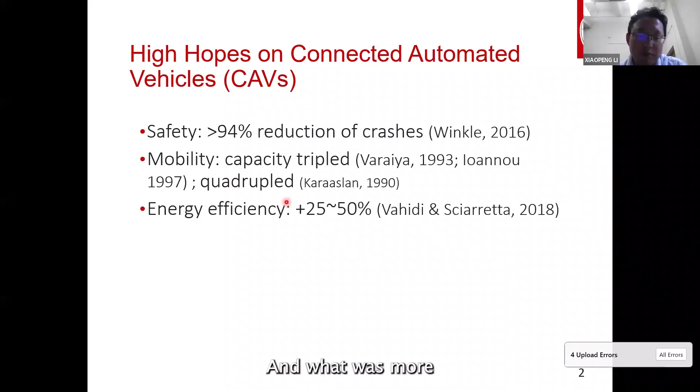There were lots of studies in the past with very optimistic predictions about autonomous vehicles, or broadly speaking, connected and automated vehicles - CAV technologies. What was more exciting was that this kind of technology was piloted in 1997, where every vehicle followed each other with very short headway at a speed of 60 miles per hour.

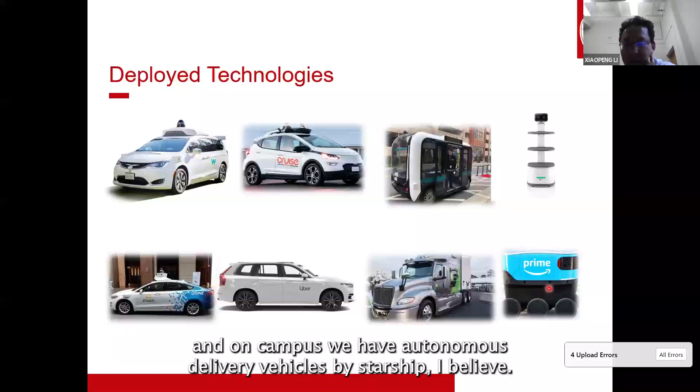So there are already lots of deployed technologies like Waymo, Cruise, and some other companies like Ford and Uber have already tried out autonomous vehicles. You also see other modes of autonomous transportation, like shuttles, that have been demonstrated. Autonomous trucks are there, and on campus we have autonomous delivery vehicles by Starship, I believe, and also in some restaurants you see this kind of delivery robots, in closed environments, in hotels or restaurants.

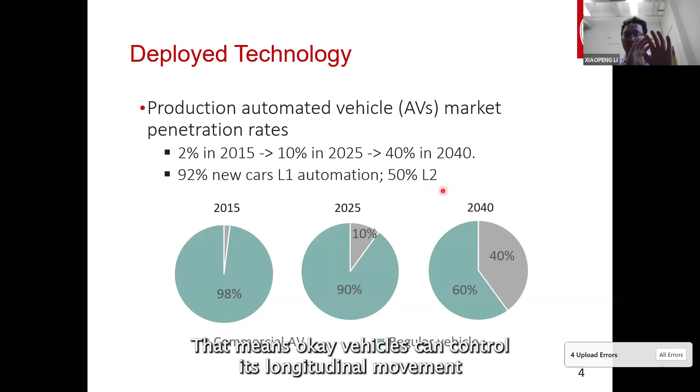So production automated vehicles have already penetrated a lot in the market. I'm talking about vehicles with automated features that you can buy from dealers. There have already been quite a lot of new cars installed with L1 automation - that basically means adaptive cruise control that can control a vehicle's longitudinal movement automatically - or with L2 level 2 automation, which means vehicles can control longitudinal movement and also do lane keeping, to make curves and turn along the road geometry.

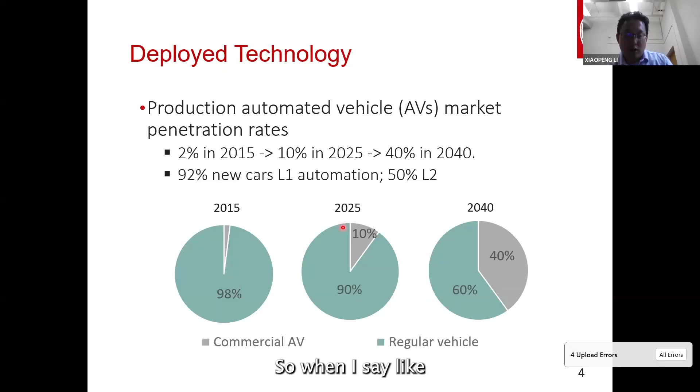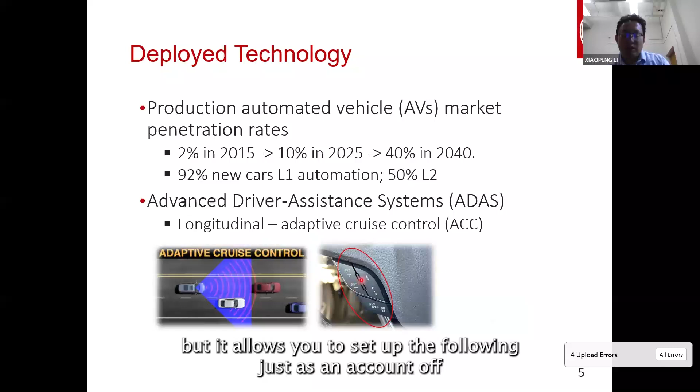So when I say L1 automation, the key technology is called adaptive cruise control, which is a significant part of advanced driver-assistance systems, ADAS. It's just going to follow the preceding vehicle automatically. If you have a car like that, it's just like cruise control, but it allows you to set up the following distance, and it can automatically react to the preceding vehicle to adjust its following spacing. You're going to see on your dashboard the following spacing, and some newer versions will show you the detected vehicles.

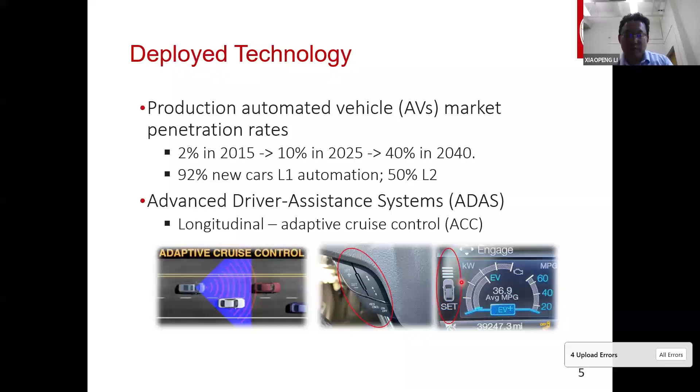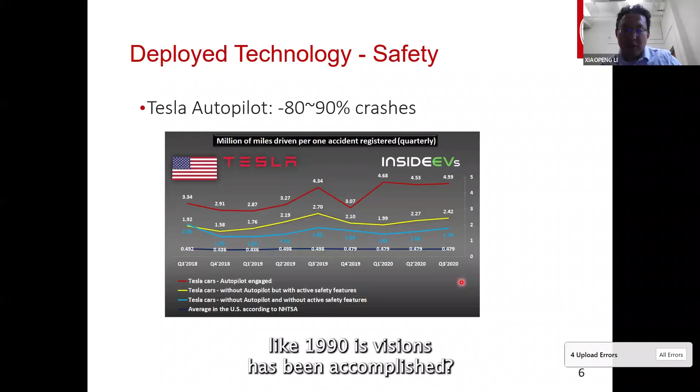So let's say, with this kind of deployment, how much of the earlier 1990s vision has been accomplished? Tesla has reported that they've significantly reduced crashes when their AV technology - they call it full self-driving or autopilot - is activated. They can actually reduce a lot of crashes. And there are other reports saying that automated vehicle technologies can significantly reduce crashes. So we're on a good track of reducing crashes.

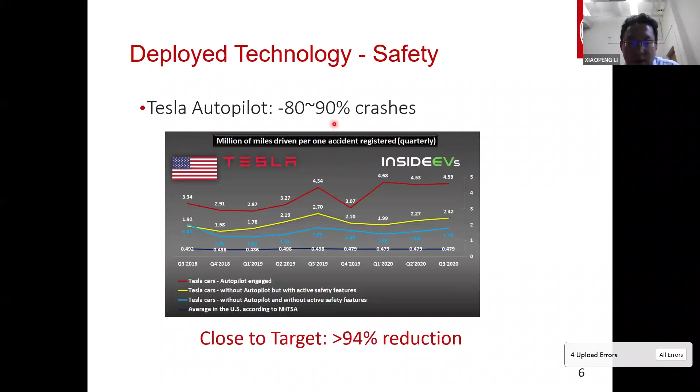And what about mobility? I think this is a little bit in my field, but I want to say, you can just look at the highest point of this graph. This is from the real world, human-driven traffic data, and this shows how many vehicles per lane a regular roadway can accommodate - about 2,000 vehicles per lane per hour. We also measured this for production automated vehicles with different headway settings. Overall, the capacity is about the same or similar levels, or some headway settings will even make it less than a human-driven vehicle. So for mobility, we haven't multiplied the capacity - we're doing something similar to current human traffic.

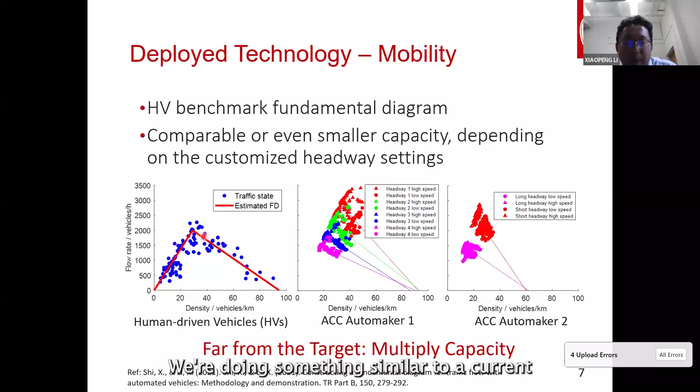So what about energy? When we talk about energy for transportation consumption, what makes changes is stop-and-go traffic - whether you stop at a signalized intersection or you're involved in frequent slowdowns in morning congestion on freeways, they cause lots of extra energy consumption. We tested automated vehicles, and they're also having lots of stop-go traffic in earlier technologies. Recent technologies we haven't included here, but we see some improvement in this aspect - they're going to have more stable traffic, which means less fuel consumption, less energy, and less environmental footprint.

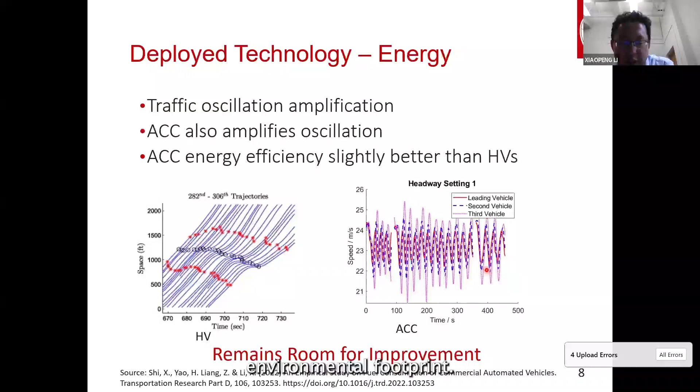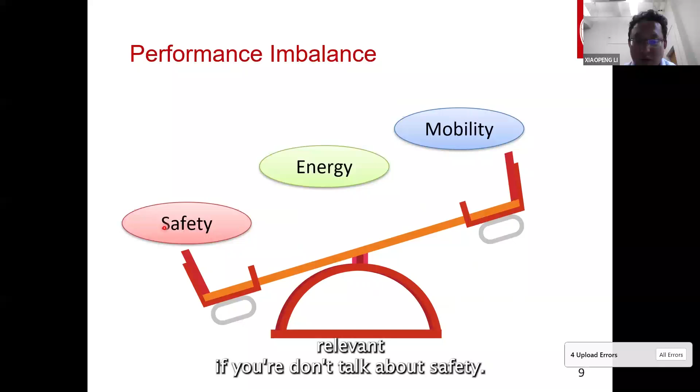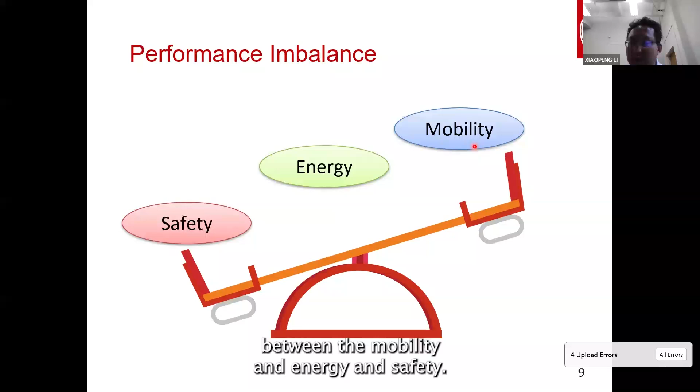So we see, if you're looking at the industry, the number one thing is safety - there's nothing relevant if you don't talk about safety. So they put a lot of effort into improving safety, whereas energy and mobility are like side products. If they can improve energy and mobility along the way, that's great, but they have to put most of their resources on safety first, and then gradually solve energy and mobility problems. So it seems there is a trade-off between mobility, energy, and safety. This study, I want to talk about this kind of trade-off.

So from the public sector, like infrastructure operators - Department of Transportation at the federal, state, city, and county level - they all have a vision that we're going to use these technologies to improve all aspects of transportation. Some of the tech vision is so-called cooperative driving automation - it's going to improve mobility and sustainability while ensuring safety.

So it has a very profound and complex framework, but what it means is actually making the vehicles work with each other, collaborate with infrastructure units. For example, I'll give you one scenario about eco-driving along a signalized intersection.

Think about this as a road that goes to a traffic signal light with green, red alternating signal patterns, and this is the time horizon. Each curve is the time-space path of an automated vehicle, AV. If the system is well coordinated in the CDA vision, you don't have to stop at the red light. You can plan your trajectory smoothly to glide through the intersection without stopping, maximizing all these performance aspects.

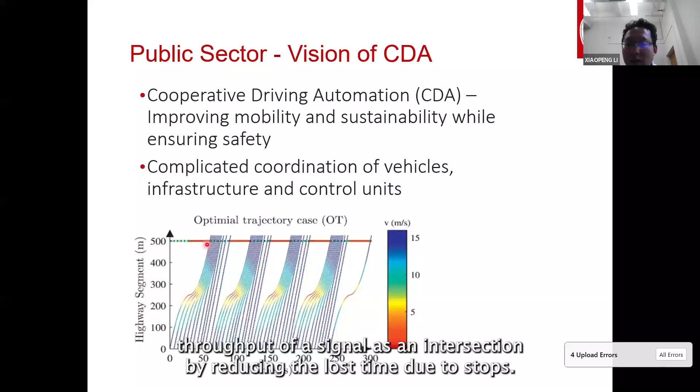You're going to have almost no stops. That saves energy, avoids rear-end collisions, and also improves the mobility throughput of a signalized intersection by reducing the lost time due to stops.

However, that is really difficult to accomplish or implement in the real world to coordinate all these vehicles and infrastructure units. There are lots of reasons behind it, institutional policy, but there is also an engineering reason: if you look into production autonomous vehicles, they cannot get very accurate control following a particular command.

This graph shows, we gave them a command to follow over time, the speed profile of this orange trajectory, but their actual vehicle speed responses, different vehicles with different settings, have quite dramatic errors from the targeting speed.

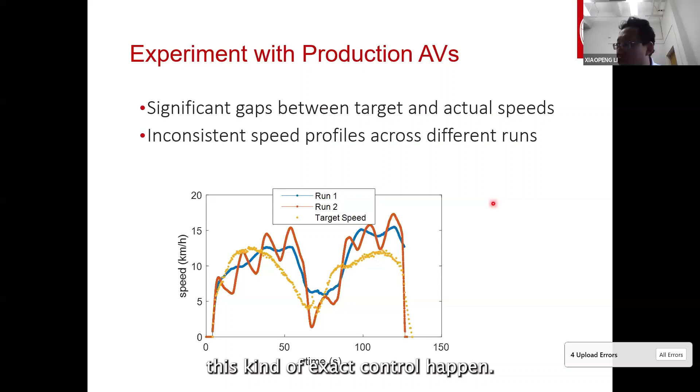And therefore, it's difficult to make this kind of exact control happen. So here is to show the trade-off. This is your target trajectory. If a vehicle can control the target trajectory exactly, you can plan them very well.

So one vehicle can closely follow each other, forming a short platoon. That's going to have an energy benefit as well as safety and mobility.

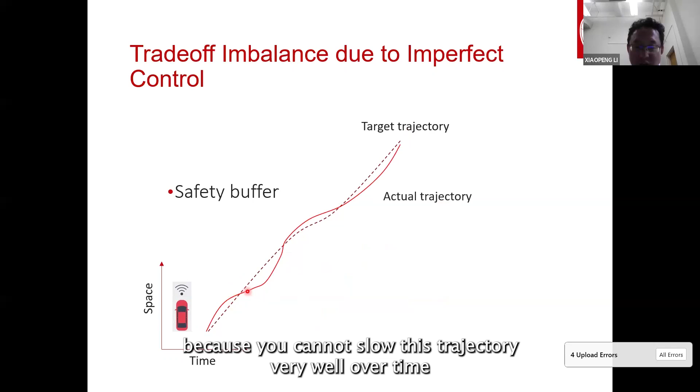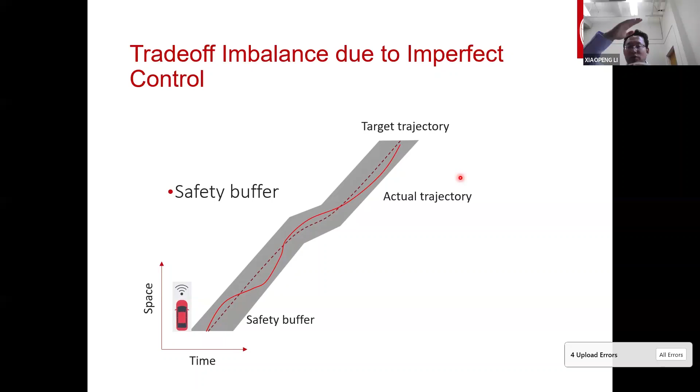But in reality, because you cannot follow this trajectory very well over time and space, you're going to add a lot of safety buffer. Therefore, you cannot follow the preceding vehicle very closely, and you're going to add extra spacing to follow the preceding vehicle. That adds some overhead to mobility.

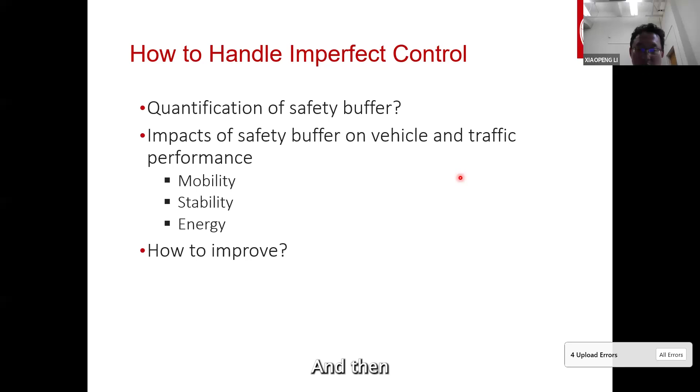So then I'm going to talk about some of our study to quantify this kind of trade-off between safety and mobility as well as energy, and then we're going to talk about ways about how to improve this.

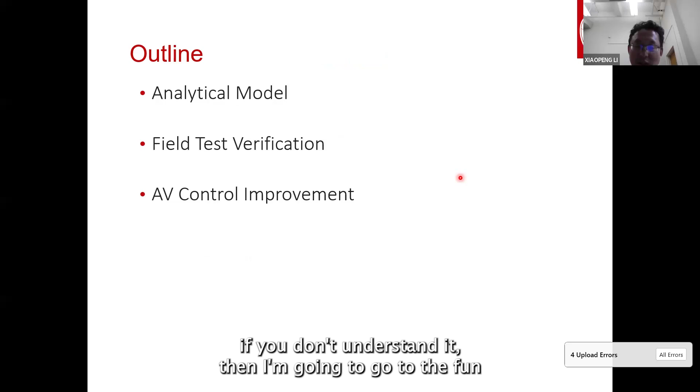So first, I'm gonna talk about an analytical model. I know maybe not everyone's from engineering here, so I'll be going through the slides quickly. It has equations, but don't worry if you don't understand it. Then I'm gonna go to the fun thing about field tests, and then I'm gonna talk about how to use better controls and other mechanisms of improving the system to have gradual improvement about energy, safety, and mobility.

Let's look into the model. I'm not gonna talk too much about the equation, but I'll give you the intuition. It is like if a vehicle, this is AV, follows a preceding vehicle along a road lane, you're gonna leave some buffer spacing for safety, and also leave some other spacing for control errors.

It's like a vehicle following a preceding vehicle. If it decelerates, you may get closer to the preceding vehicle, and if the preceding vehicle accelerates, you may get away from it. So the following vehicle has some kind of variation in relation to the preceding vehicle's position, like there's some relative speed difference, so the following vehicle may oscillate.

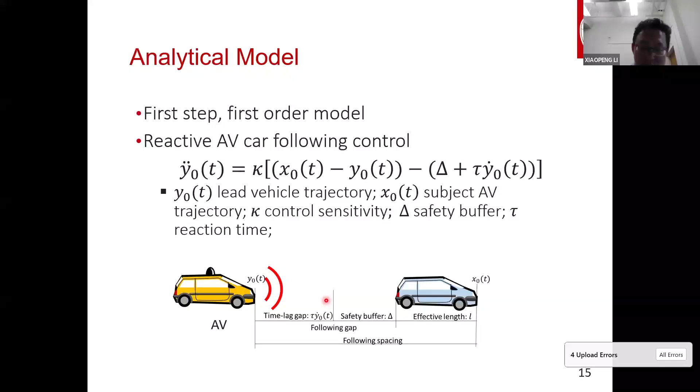So you're going to have some time lag to absorb the oscillation, as well as leave some safety buffer in case the oscillation goes too much. You want to make sure that safety buffer is always sufficient to absorb the overshoot of the oscillation. So with that, you can set some parameters that represent safety, mobility, and stability.

Stability is actually very much relevant to energy consumption. You can equate this to energy consumption or environmental impact.

All right, so there's some analytical design about it. You just formulate the equations with the simplest parameters, showing that this delta is a safety buffer, and this kappa here is actually how sensitive we react to the preceding vehicle's deceleration and acceleration. If the preceding vehicle decelerates, you may decelerate, but how sensitive that is, is captured by kappa here.

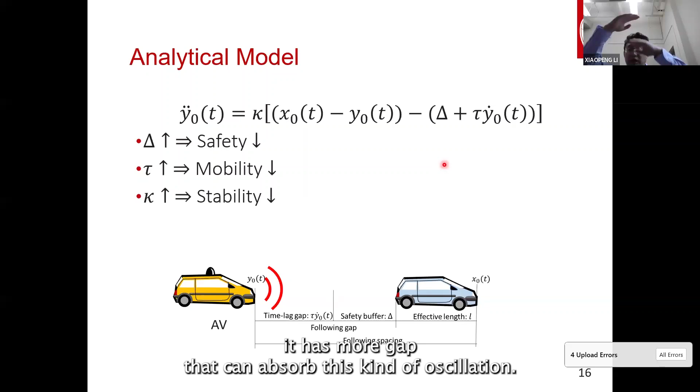Tau is basically how long this gap is. The longer the gap, the more it's gonna make the capacity drop, because it takes a longer time for one vehicle to pass that point on the road. But the benefit intuitively is it has more gap that can absorb this kind of oscillation.

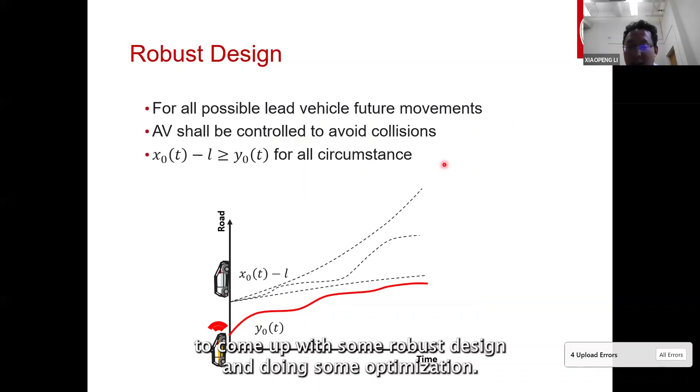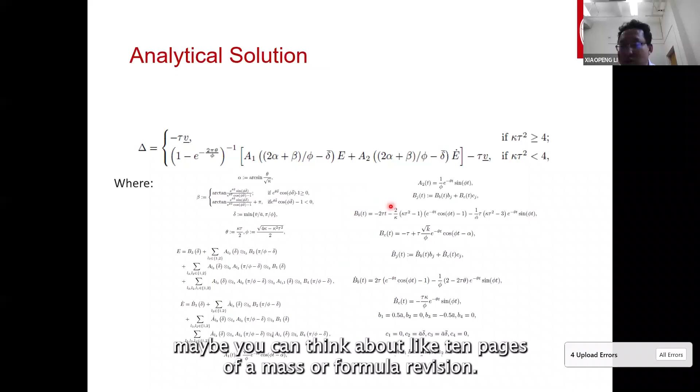So with this formulation, we're gonna come up with some robust design and do some optimization. It's a very complicated equation, I'm not gonna talk too much about it, but with all our effort, think about like 10 pages of math or formula derivation. We solved the relationships between these parameters, and I think we can talk a little bit about this.

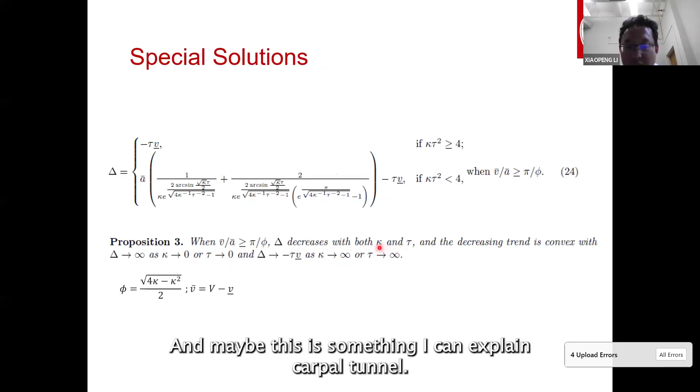You can ignore the math, but I want to say delta decreases with both kappa and tau. Maybe I can explain this. Kappa and tau are actually relevant to the stability. The bigger the kappa and the bigger the tau...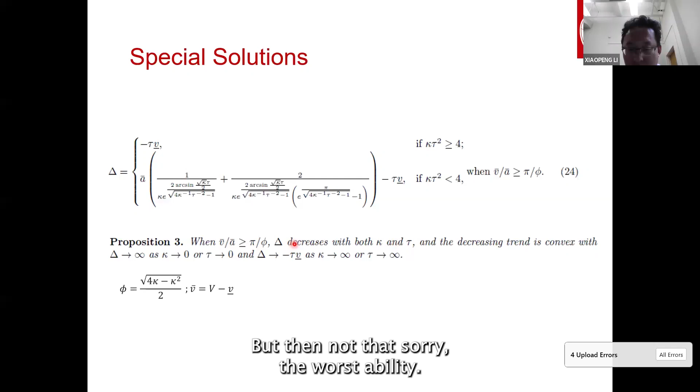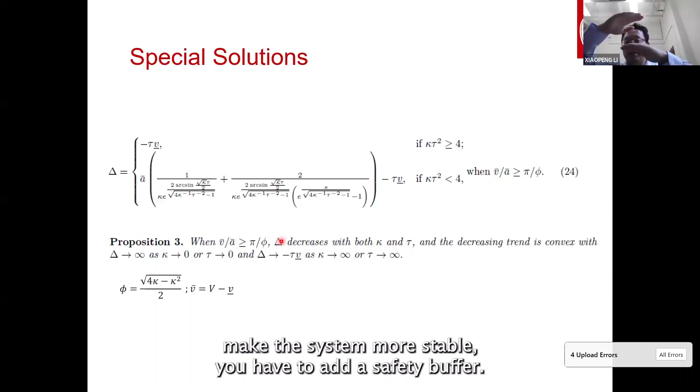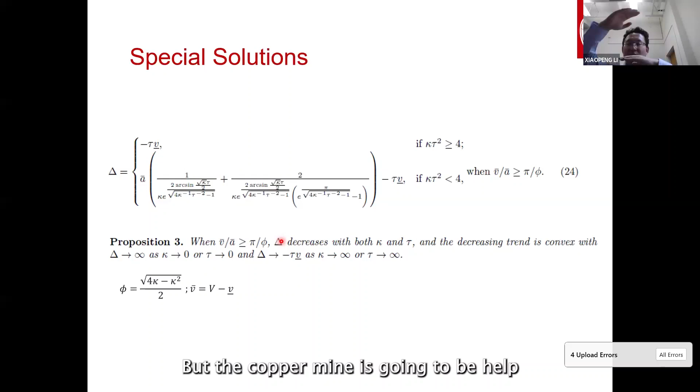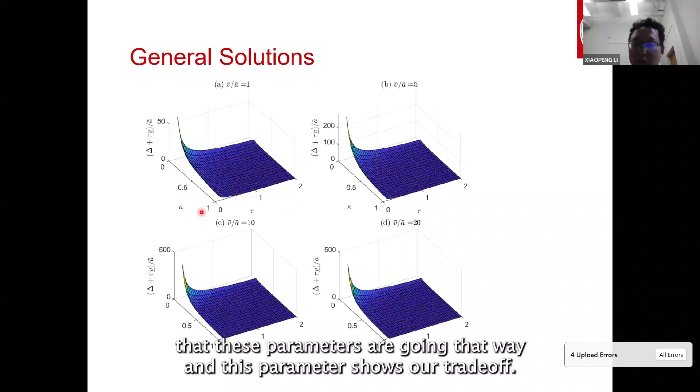There's something like this, I'm going to skip it. It just shows these parameters are going that way, and this parameter shows our trade-off. If you ignore the math, if you want to improve the mobility, you're going to sacrifice the safety, or increase the safety risks. Or if you want to improve the safety, you're going to sacrifice the mobility.

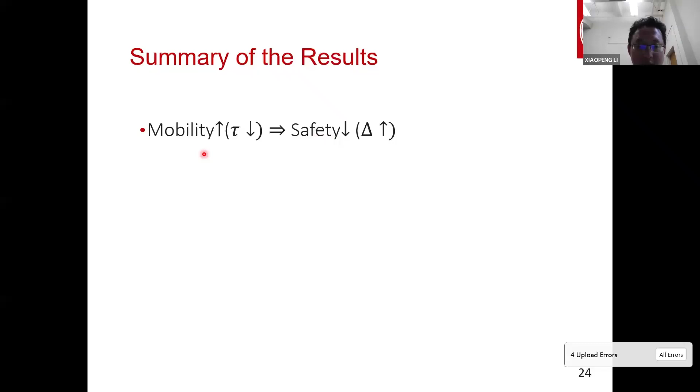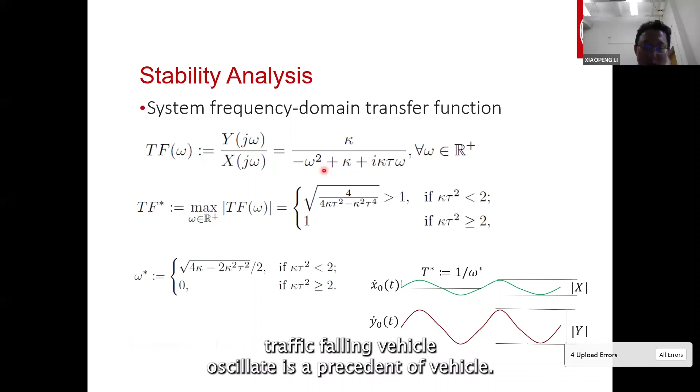With some frequency domain analysis, looking into how a following vehicle oscillates with a preceding vehicle - I'm gonna skip the math, but you'll find another property: if you want to improve the mobility, you're gonna increase the traffic oscillation. Vehicles tend to be more stop and go, and it's gonna increase the energy consumption.

The math is complicated, the proof is complicated, but the conclusions verify somehow our intuition. I can give you an extreme example: if everybody really keeps a very long headway from the preceding vehicle - let's say you always keep your vehicle 1 mile away - you're not gonna have crash risk, but the traffic is not gonna move. Think about Madison, we don't have enough roadways to accommodate that kind of traffic. So mobility and safety is a trade-off.

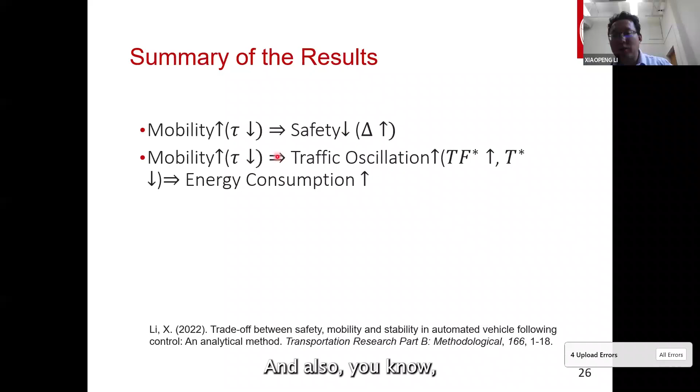Mobility and energy consumption is also a trade-off. If you want to push vehicles through the system faster, the vehicles tend to have more oscillations, stop and go, and congestion, and that's going to create extra energy consumption.

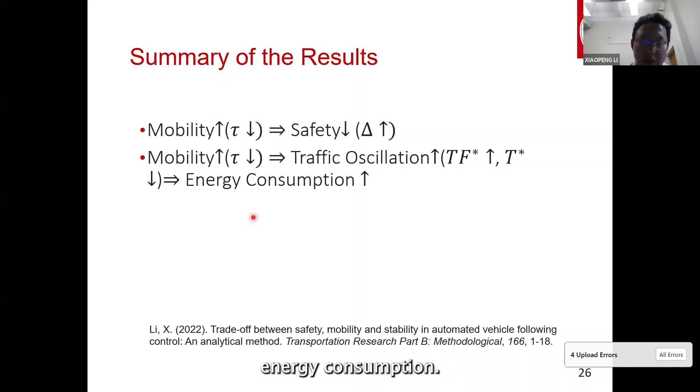So we have this theory, and we did some field verifications - we have the theory and the derivations, but let's do some field experiments. We used our lab's vehicles, production automated vehicles with ADAS functions like adaptive cruise control, similar to autopilot. We put some equipment like GPS to record the data, and we tested them at a site in Tampa, Florida, where I worked before.

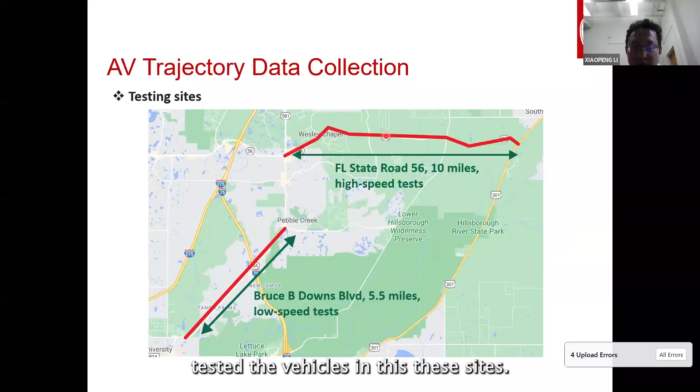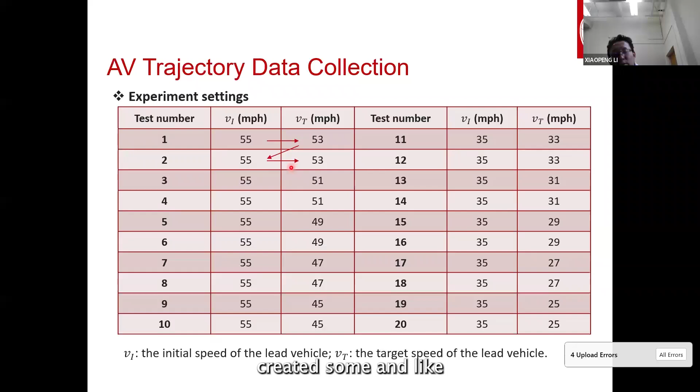We tested the vehicles at these sites, with experiments of one AV following another AV, or two AVs following a reference vehicle, and we changed the speed to create realistic deceleration and acceleration patterns. These are the speed profiles we collected - these for two vehicles, and these for multiple vehicles.

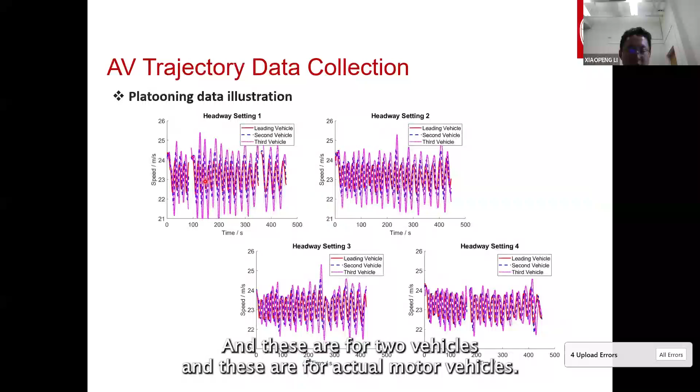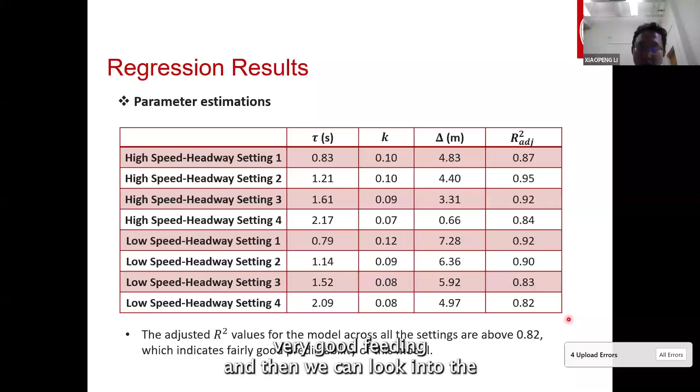So what we did is get the data and feed it into the model we proposed, and extract the parameter values - the fitting is pretty good. Looking at the fittings, they're as high as 90 or 80%, R-squared values all above 0.8, very good fitting. And then we can look into some of the new interesting findings.

The headway setting is like 1 is shortest headway, 4 is the longest headway. And that maps to our tau very well. Tau increases with the headway settings. And headway settings also actually follow gap headways. These are just intuitively the same. The headway settings have been well explained by our parameters.

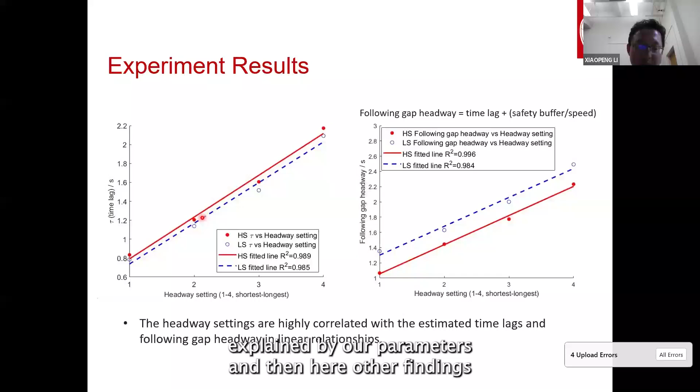And then here are the findings. Delta increases, the tau is going to decrease. This K or kappa increases, tau is going to decrease. So these are exactly well matched with our theoretical prediction.

Our theory predicts that one variable increases, the other variable is actually going to decrease due to the trade-off. And this study actually will explain that trade-off.

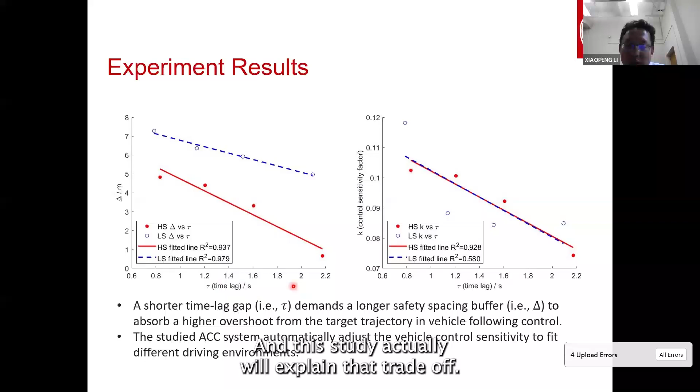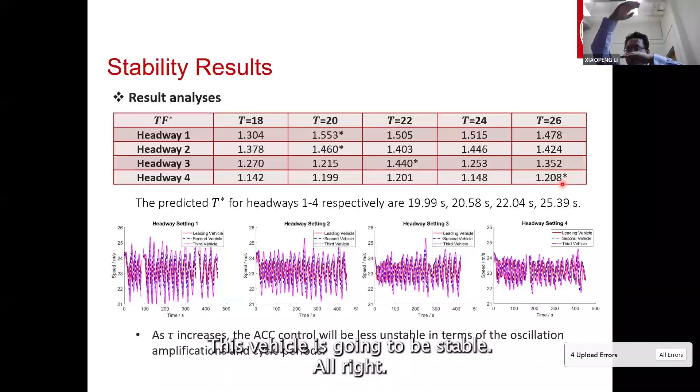I look into the amplification ratio, that is the following vehicle's oscillation divided by the current vehicle's oscillation. We're going to see as this headway increases, this extreme amplification decreases. That means as headway increases, oscillation is going to decrease. So shorter headway, this vehicle is going to do this kind of high oscillation. Longer headway, this vehicle is going to be stable. All right, that explains the theoretical prediction.

Okay, we verify these results with another set of data collected by a different university, and the fitted value matches the theoretical predictions. It's like they have this kind of trade-off actually. So yeah, this is interesting because the theoretical results match the field experiment.

And actually, when I proposed this, my students thought it might be just a theory, and I didn't believe it. Then I said, go ahead and prove I'm wrong. And then they did the experiments and proved that we were right. Actually, that was good. Or in a parallel universe, if I was proven wrong, I'd also be happy, most likely equally, because we also have some other discoveries. But I mean, this time we're fortunate to have it consistent with our conjecture, and that explains the fundamental trade-off, and that governs the industry's design.

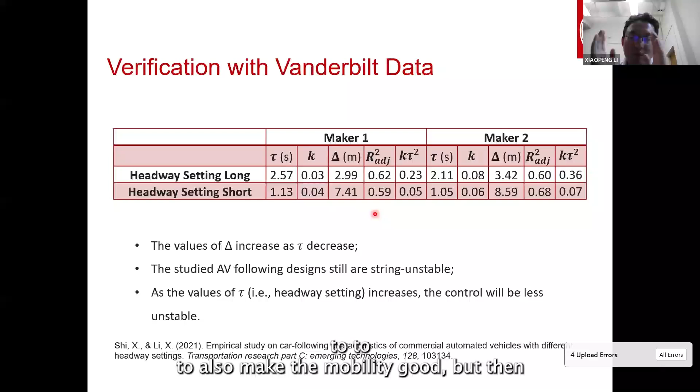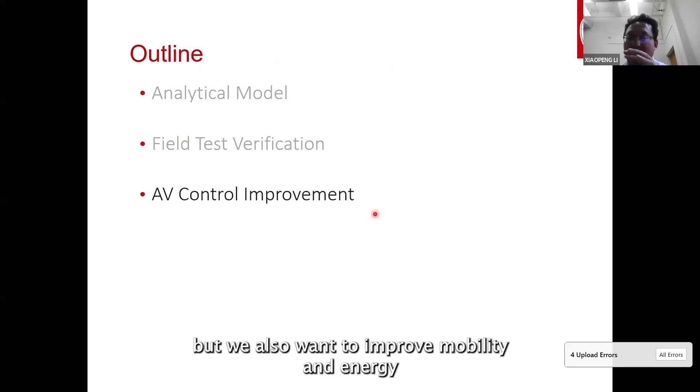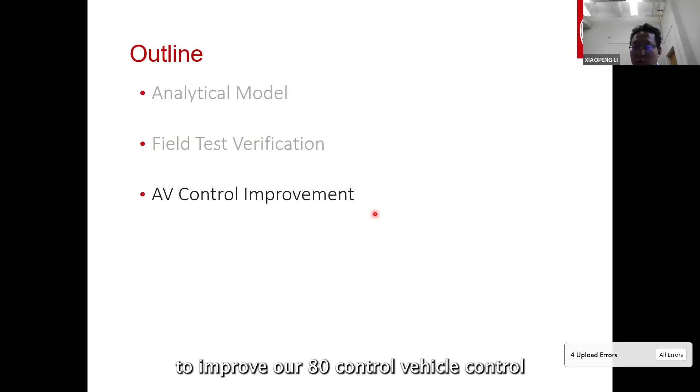If I have a simple system, I'd rather like to maintain the safety part rather than go too far to also make the mobility good. But then eventually from the public sector's perspective, we hope that we always put safety first, but we also want to improve mobility and energy efficiency as well. So is there any takeaway from these studies on how we're gonna improve our AV vehicle control system design to improve the energy and mobility altogether with safety?

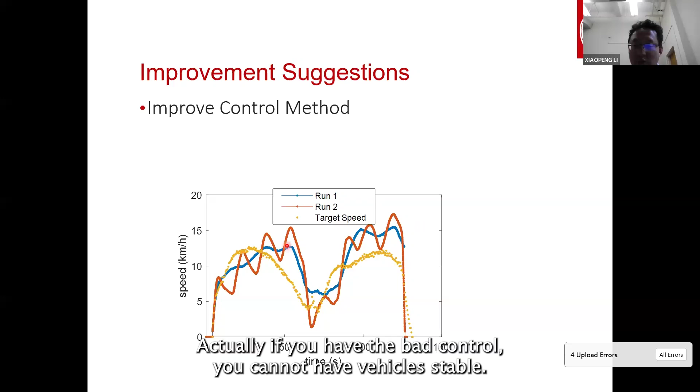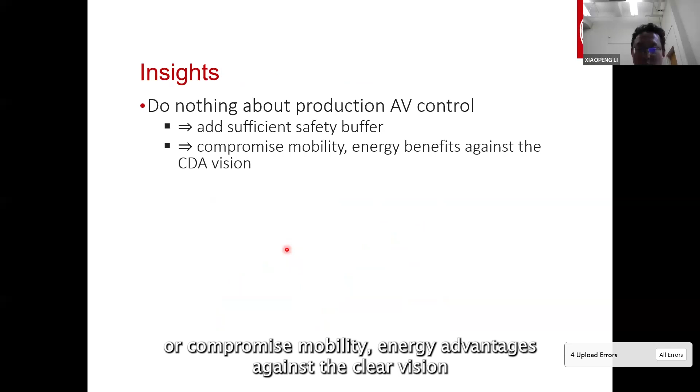Yeah, sure. First is improve the control, actually. If you have bad control, you cannot have vehicles stably follow the preceding vehicle. That's a problem. So how can we do that? Do nothing about the production vehicle, then you have to add a sufficient safety buffer, or compromise mobility and energy benefits against the CDA vision, or improve the vehicle control precision.

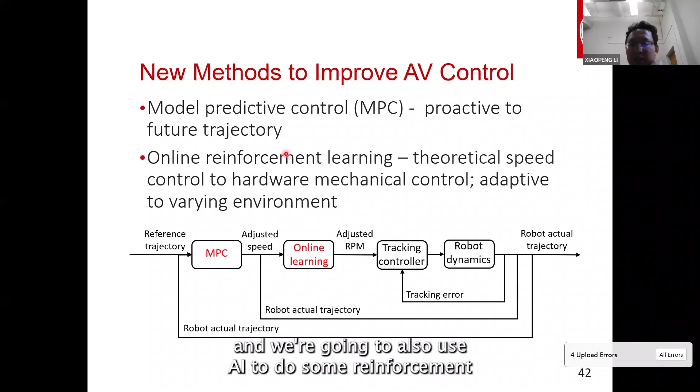What we do is, instead of the classic feedback like PID control, we use model predictive control, and we also use AI to do some reinforcement learning to improve the adaptivity of that vehicle. And we did some tests with small vehicles, and we found that after we make the control more about reinforcement learning, you get a much better control outcome actually.

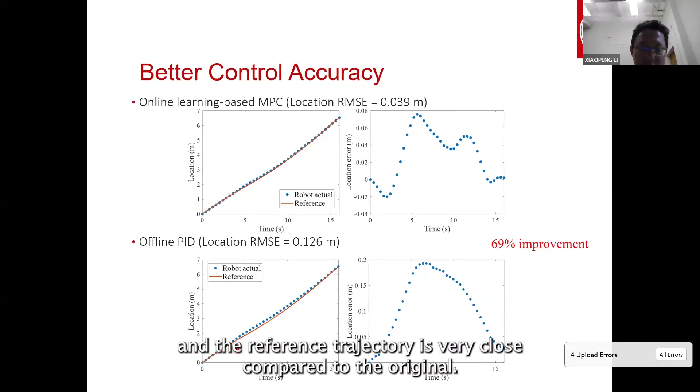Here is like online learning. You're gonna see the actual control and the reference trajectory are very close, compared to the original PID control, where there is a big gap.

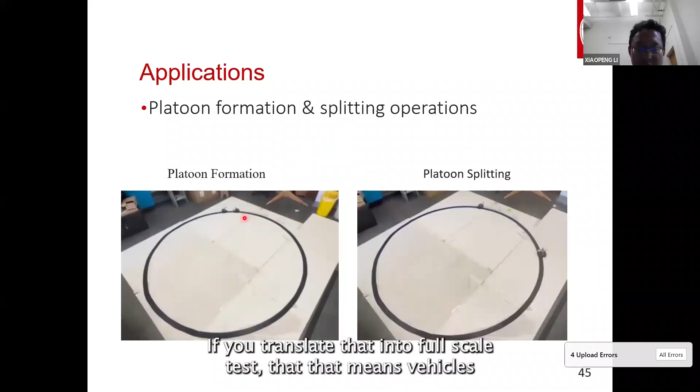And these are some of the tests where we have vehicles following each other and forming a platoon, and they can run very smoothly. If you translate that into full-scale tests, that means vehicles follow each other stably with a very short gap.

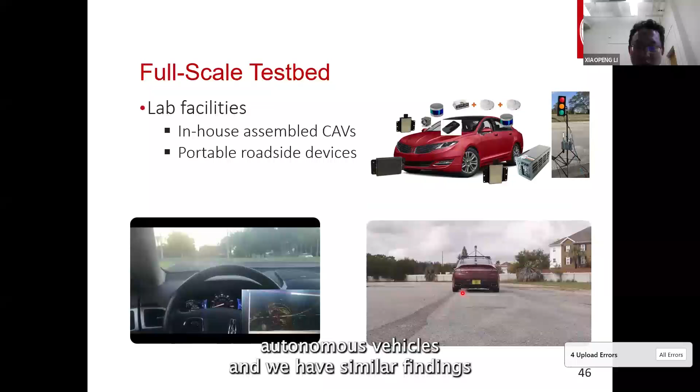Okay, and we also did some field experiments with our full-scale autonomous vehicles, and we have similar findings. We used some of these facilities to showcase at engineering expos. This was before I moved to here, but I joined UW-Madison three years ago, and we also have a lot of good demonstrations of the facilities that we have.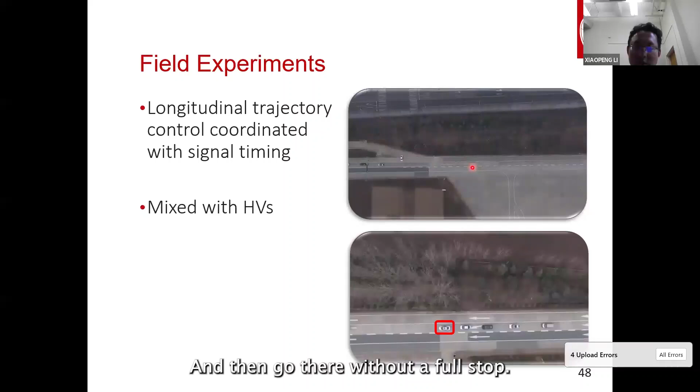That is very nice. And we also did the test with Argonne National Lab. We tried out this kind of signal coordination with multiple signalized intersections, and it works as well.

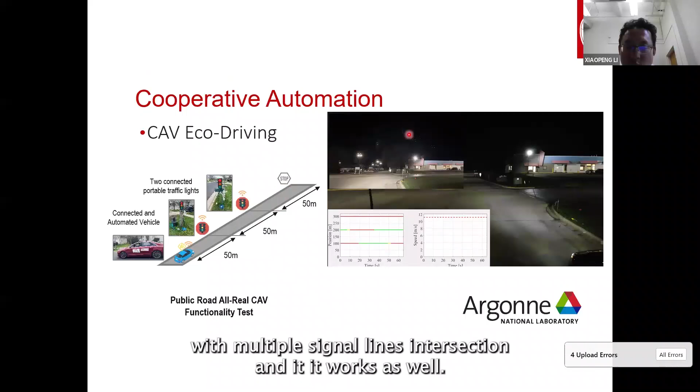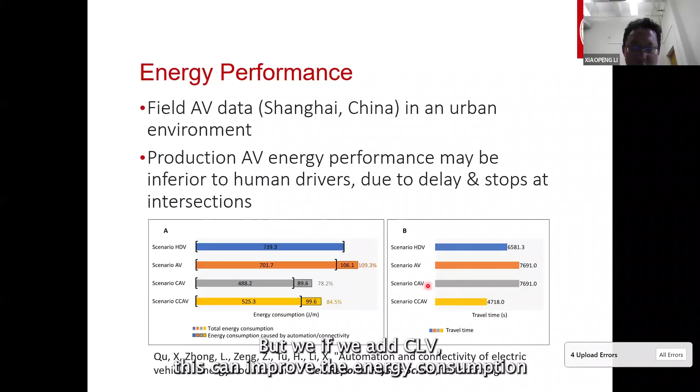So integrating with the connectivity is going to be a great element to improve the vehicle's performance. We did a study using Shanghai data, and found that production AVs' energy performance may be even worse than human drivers due to delays at intersections. But if we add CAV, that's going to improve the energy consumption and also improve the overall system sustainability.

And we also worked on similar technologies with US DOT and US DOE to hopefully use communication to improve the traffic and make it smoother and faster.

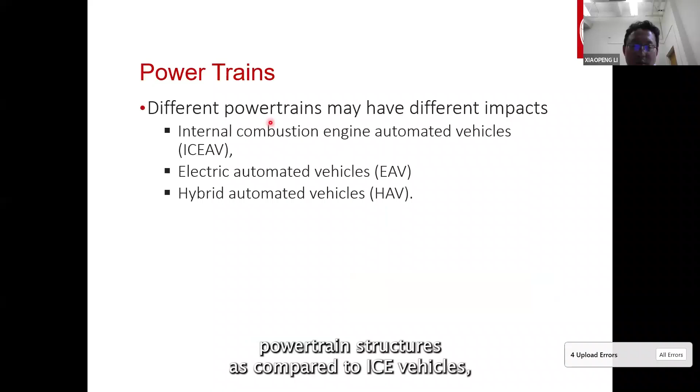Of course, electrification is also another way that we look into. Electric vehicles have different powertrain structures as compared to ICE vehicles.

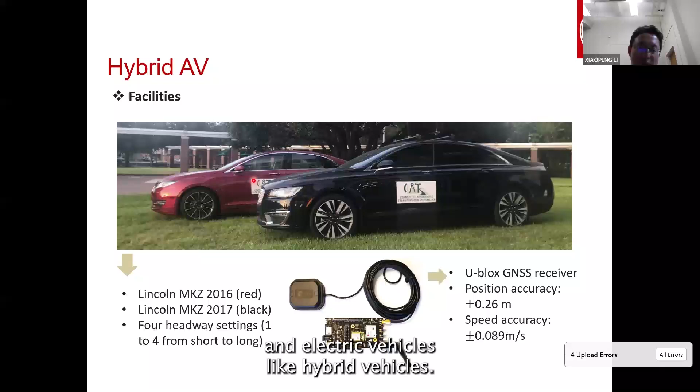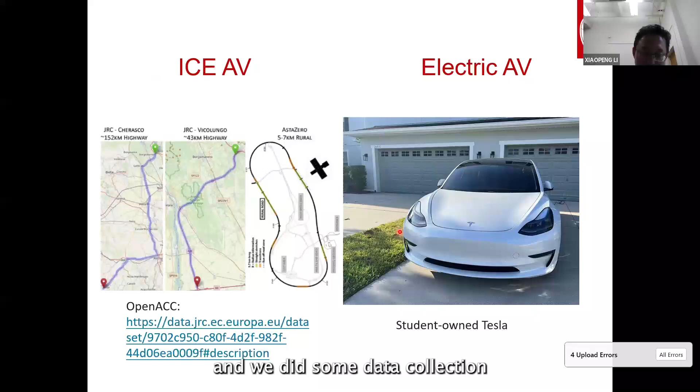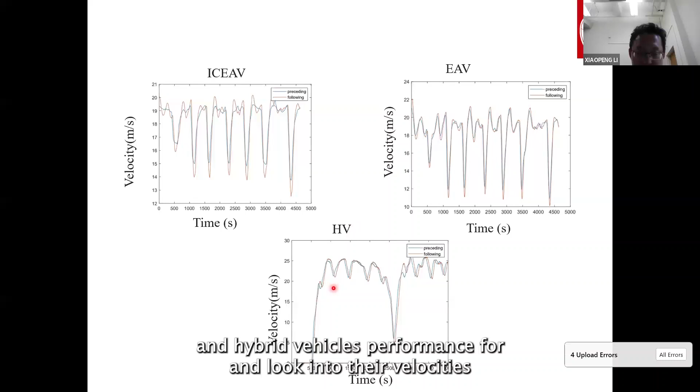And we actually tested hybrid and electric vehicles, like the vehicles we tested before. I have wonderful students who donated some time of his Tesla vehicle, and we did some data collection, comparing the ICE vehicle and electric AV and hybrid vehicle performance, looking into their velocity profiles over time, and we showed their stability and also mobility.

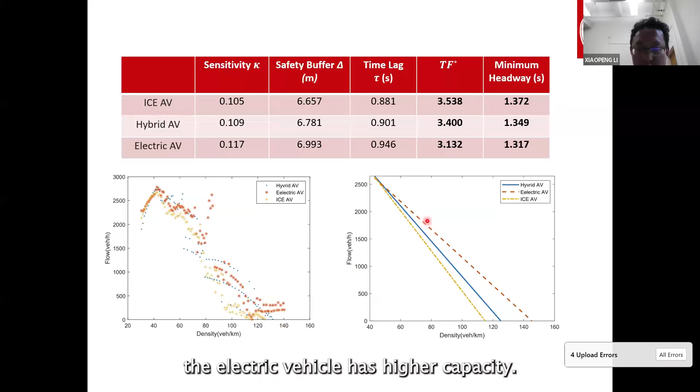We're going to find that if you're looking at these profiles, they have similar traffic flow capacity, but as your density increases, the electric vehicle has higher capacity because it has better stability.

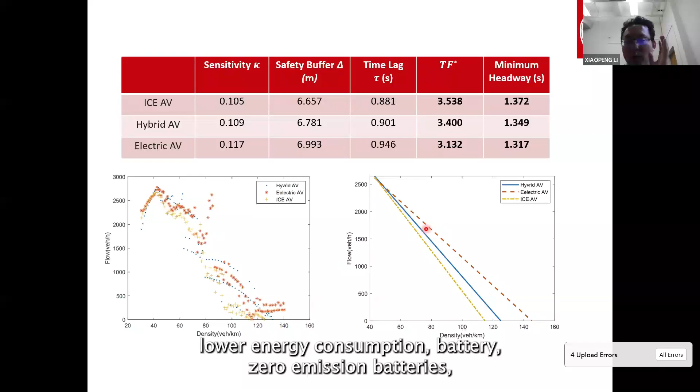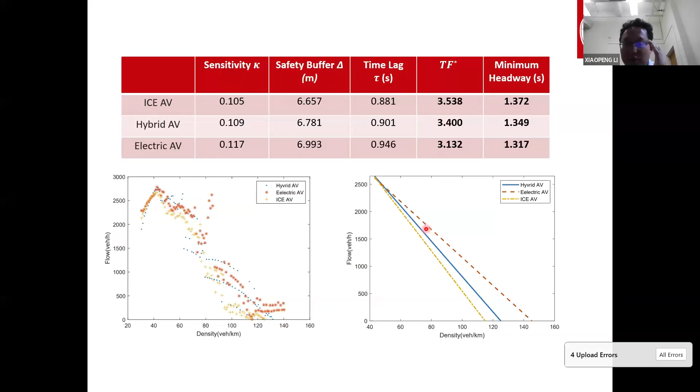So that means maybe electrification could also make the vehicle's response more fast, and therefore you can control it better. Besides the intrinsic benefit of lower energy consumption batteries, zero emission batteries, you can also improve overall sustainability through better traffic impact. You're going to have smoother traffic with probably closer headway, right?

We are also actively looking into newer technology like foundation models, vision language models, model predictive control, and high level decision making. For high vision, this kind of foundation model can use high level decision making and classic control for lower level vehicle control, and you can have that flow chart to really integrate vision language models and ChatGPT type of intelligence to improve autonomous vehicle driving, realize end-to-end vehicle control, and improve the vehicle performance.

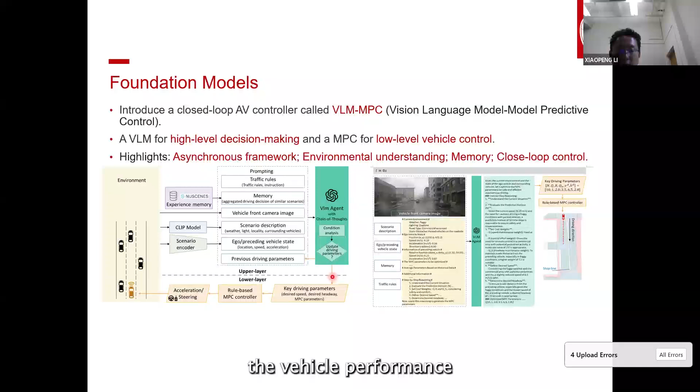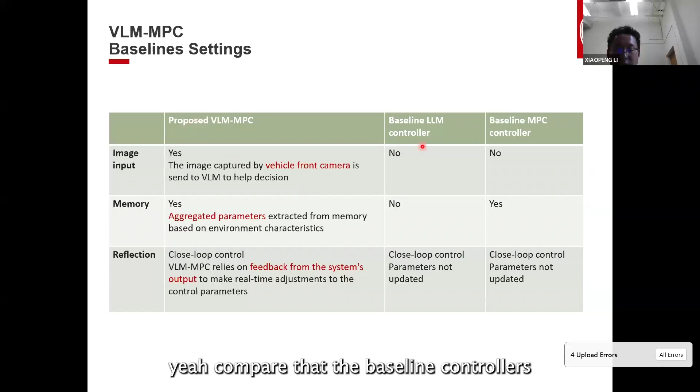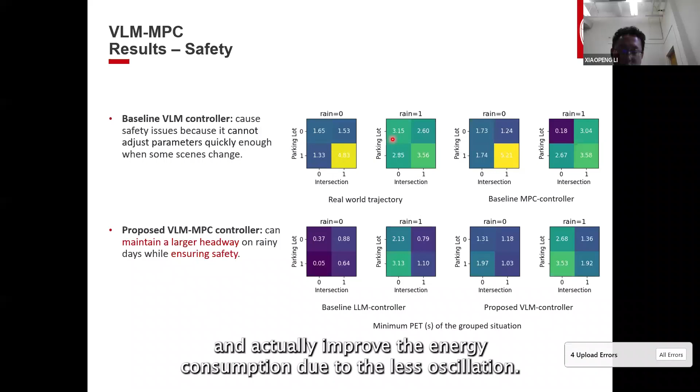We did some comparison, comparing baseline controllers with our proposed controllers, and we found that our proposed controller using VLM-like foundation models will make the system safer without losing the mobility or energy, and actually improve the energy consumption due to less oscillation. These are just comparing different language models, and they all show good improvement.

I'll just stop here in case you have questions.